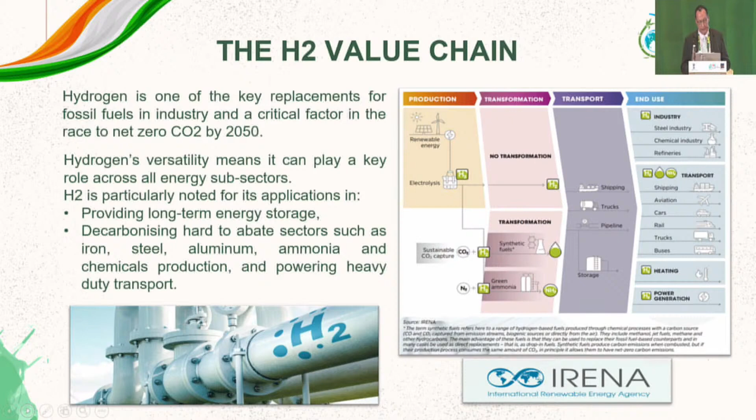Hydrogen may be a small molecule, but it's hugely important when it comes to decarbonising transport and industry. Hydrogen is a Swiss army knife because it is so versatile and can be used across a vast range of applications: in transport, in buildings, in power generation, in industrial processes, and more. But today I haven't really got time to go through all of those precise uses. I want to focus initially on how hydrogen is made.

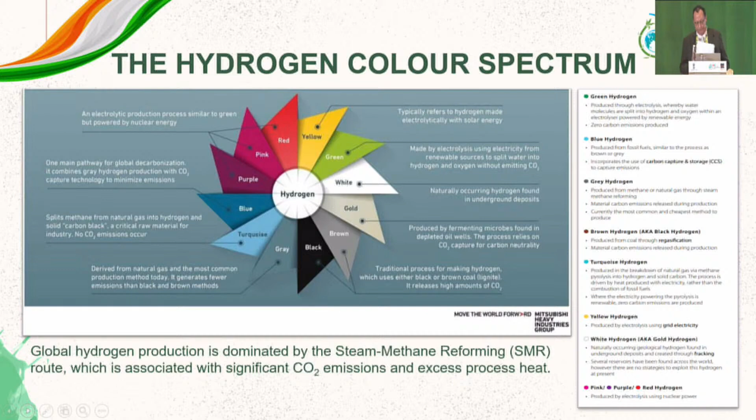Blue hydrogen involves steam reforming of natural gas, but then capturing the CO2 emissions. That CO2 can be stored or used in applications, so it's a lower clean hydrogen. Beyond black, brown, grey and blue, there are another 8 shades of hydrogen: turquoise, purple, pink, red, yellow, white, and then there's green hydrogen. In this slide, I try to capture which are seen as the clean hydrogens at the moment. Only a few qualify, as you can see there. Obviously, green hydrogen is the new gold standard for hydrogen production.

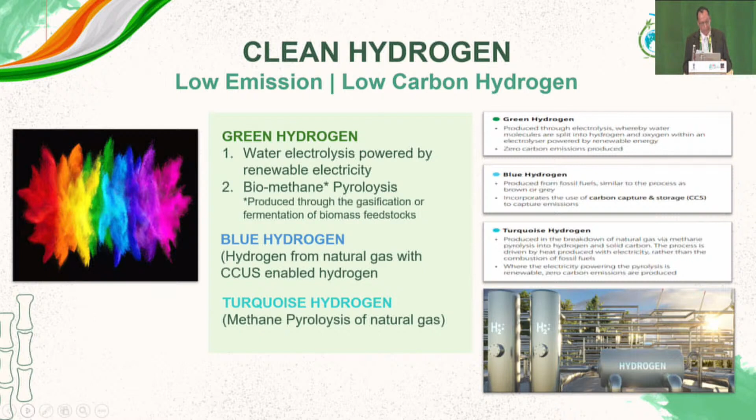And then, of course, you have blue hydrogen, where the CO2 emitted from natural gas is captured and used. And then there's turquoise hydrogen, where natural gas is used under a different technology, pyrolysis. Pyrolysis allows the carbon in natural gas to be captured in solid form, so it doesn't get emitted into the atmosphere. And then there is the biomass-derived hydrogen, which is the important one for the sugar industry. If you're producing biomethane, you can produce a hydrogen that is carbon neutral or even carbon negative.

Green hydrogen is produced with no CO2 emissions from renewable sources of electricity, such as wind, hydro, and solar, and then an electrolyzer is used to break water into hydrogen and oxygen in a process called electrolysis. That's the most basic and only way to make green hydrogen.

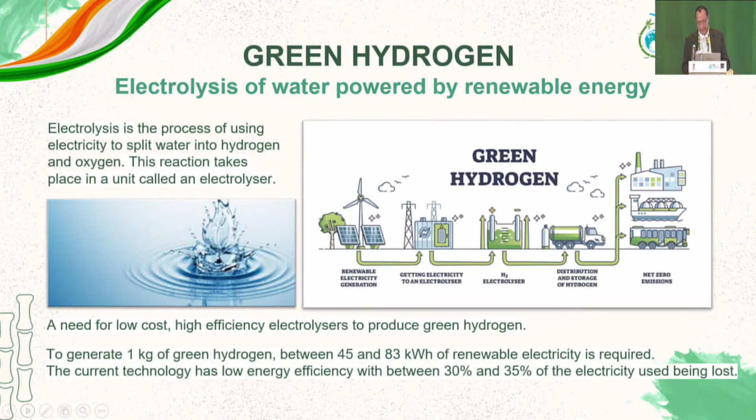Saudi Arabia is currently building the world's largest green hydrogen project. It's a joint venture. It is going to need about 4 gigawatts of solar and wind energy to produce 600 tons of hydrogen every day, of green hydrogen. That development is costing around $8.5 billion US dollars. It's a big investment.

Once produced, that green hydrogen will be made into green ammonia because it's going to be far easier to handle. And I'll come back to how you can convert hydrogen into a different substance for distribution and storage.

I just quickly want to emphasize again blue hydrogen and the importance of the carbon capture, use and storage technique, because blue hydrogen is about the only hydrogen that can be scalable and easily meet a clean hydrogen mandate. So it's important to know that as green hydrogen capacity is developed, you really are going to be developing alongside the blue hydrogen production from natural gas.

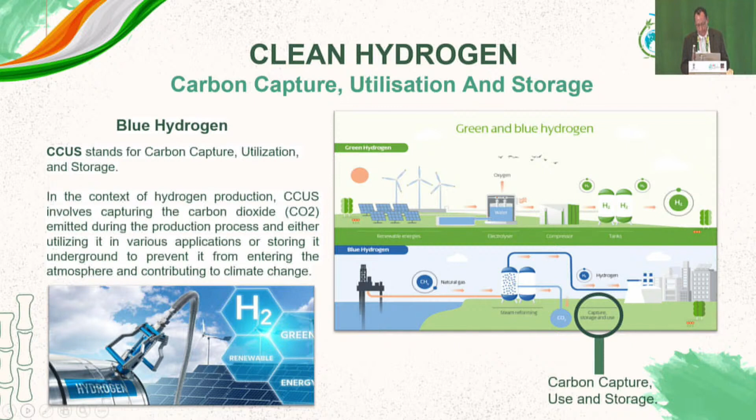Looking now a bit at the size of the hydrogen usage, according to the International Energy Agency, the world used about 95 million tons of hydrogen in 2022. That's around 3% of the world's energy use, and it's similar in size to what Germany would use in a single year.

Of that H2 use, only 0.1% was green hydrogen.

You'll also see here that there's a scenario for 2030 under the IEA's net zero emissions scenario, and it shows that by 2030, the world should be using around 150 million tons of hydrogen. And you can see that there are some new uses for hydrogen by 2030. Presently, you see use in refining and in industry, but in 2030, you see use in transport, synthetic fuels, and the power sector.

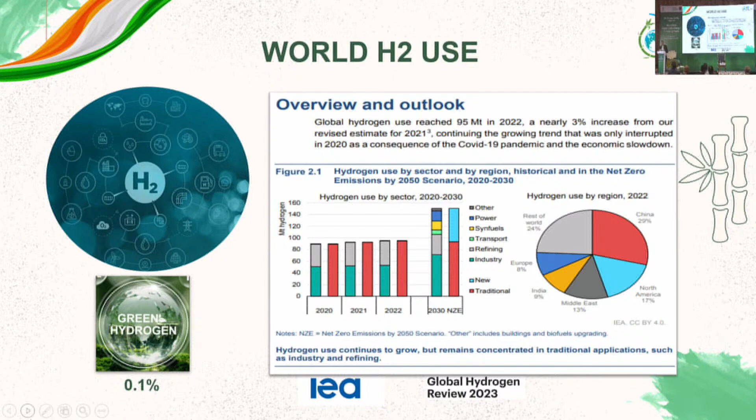Flip the coin to the production side. Well, it will obviously match at 95 million tons, but production was dominated by the unabated use of fossil fuels. Natural gas without carbon capture accounted for around 60% of production, while use of coal, mainly in China, accounted for around 21% of production. And then you have the remaining 16% produced as a byproduct of industrial processes in oil refining and in the petrochemical industry.

In terms of cleaner hydrogen, production was less than 1 million tonnes in 2022, and that was mostly blue hydrogen. Production of green hydrogen was around 100 kilotonnes, and that's how you get that 0.1% figure that I noted in the previous slide.

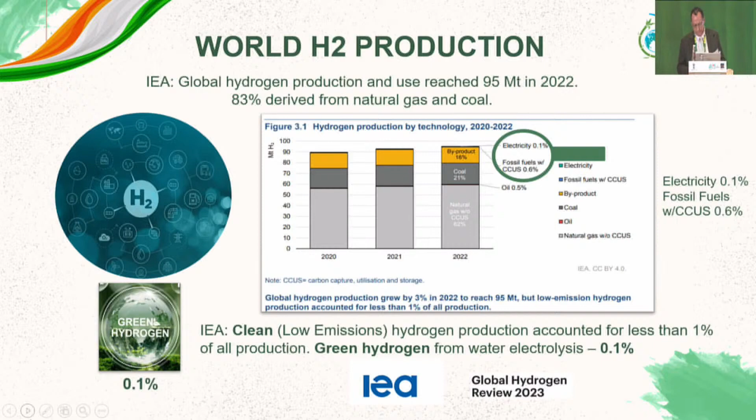Looking forwards, to align with the IEA's net zero emissions scenario, green hydrogen capacity must grow by more than 100 times by 2030. So within the next 8 years, we need to see production expand by 100 times.

Let me take just a couple of minutes to look at some of the new ways that hydrogen is going to be used, particularly in the transport sector. The fuel cell technology, hydrogen fuel cells, very important.

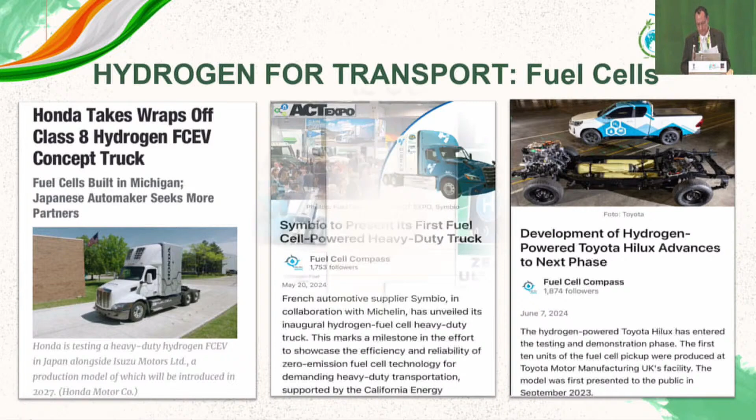There are also hydrogen internal combustion engines. They have a role to play in the coming years too, because you can get an immediate reduction in CO2 emissions while the fuel cell technology develops.

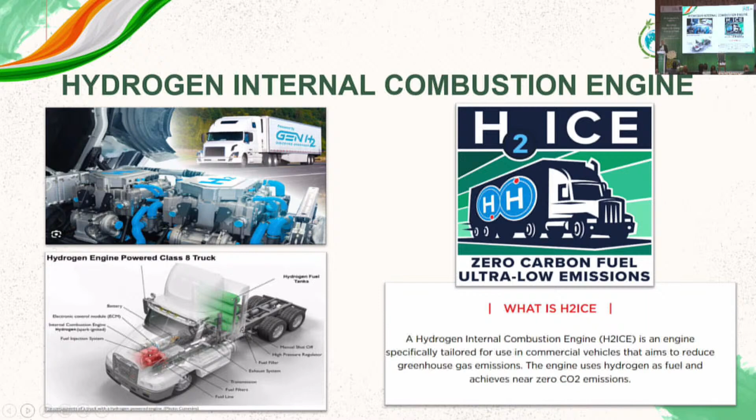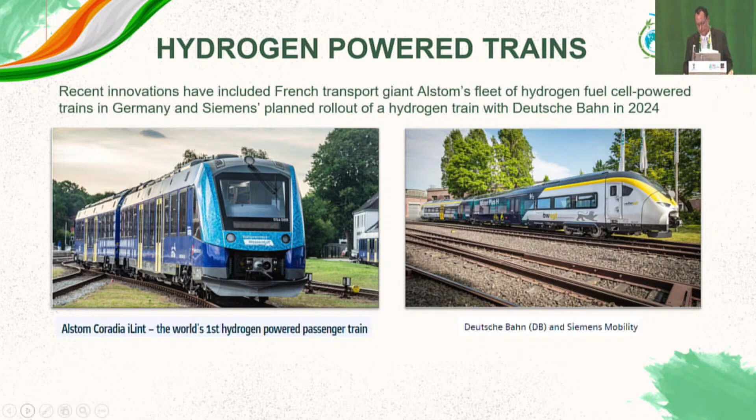Hydrogen-powered trains are already a reality in Europe. Here we have trains in Germany and France that run on hydrogen fuel cells. Hydrogen-powered aircraft are not a reality, but Airbus has the ambition to bring to market a hydrogen-powered commercial aircraft by 2035.

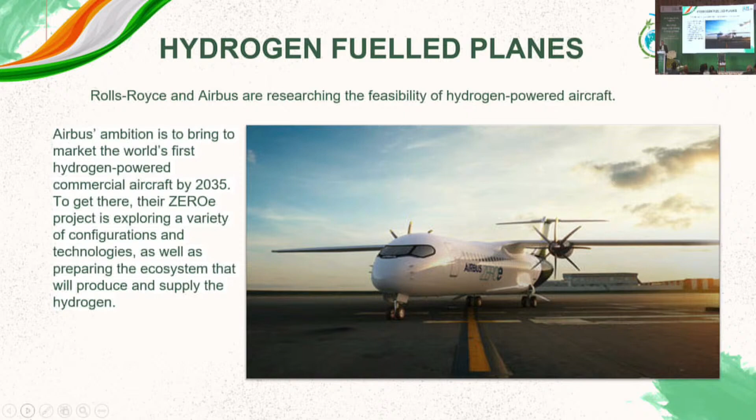We already heard about sustainable aviation fuels this morning in the previous panel. SAF is the only viable way to decarbonise aviation, and that will be the case for quite a few years to come. So as we heard this morning, SAF is a real opportunity for the world sugar industry through that alcohol-to-jet route.

Another use for hydrogen is in synfuels. They are synthetic hydrocarbons that need hydrogen to be manufactured, obviously. They can be a drop-in solution with existing fuels using existing logistics and distribution and refueling. Importantly, e-fuels drastically reduce the harmful emissions from internal combustion engines, and so can play a key role in decarbonising transport. But really, synfuels, e-fuels, compete directly with biofuels in the transport sector.

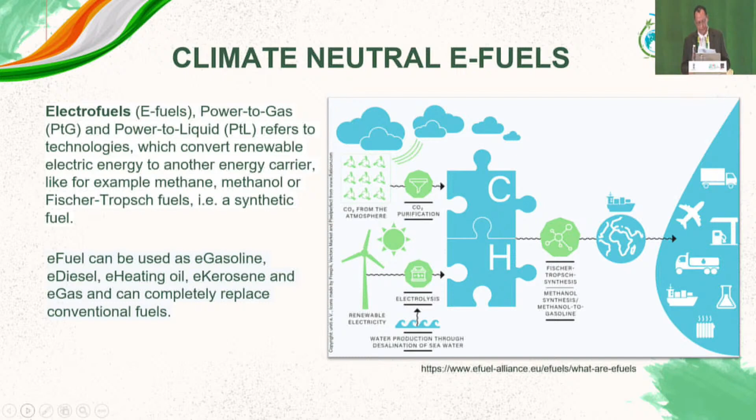And here, hydrogen for green steel manufacture. Iron and steel are a major contributor to CO2 emissions worldwide, because they use a lot of coal. But green steel making is becoming a reality. Sweden's largest electrolyzer project has been inaugurated to produce green hydrogen for green steel manufacture. The magic of hydrogen is that it makes the entire process carbon-free. By reacting hydrogen directly with iron ore, iron and water are produced instead of iron and CO2 when you use coal.

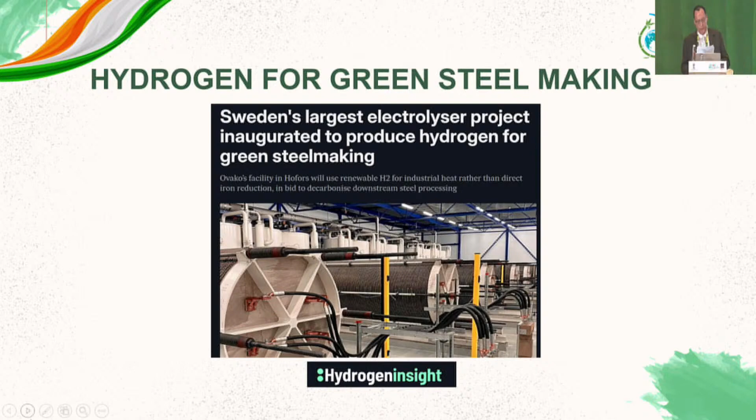But it's not all a fairy tale. There are some real challenges to pursuing hydrogen and green hydrogen in particular. I've listed a few on this slide, but in the time I have available, let's just quickly look at the cost of green hydrogen.

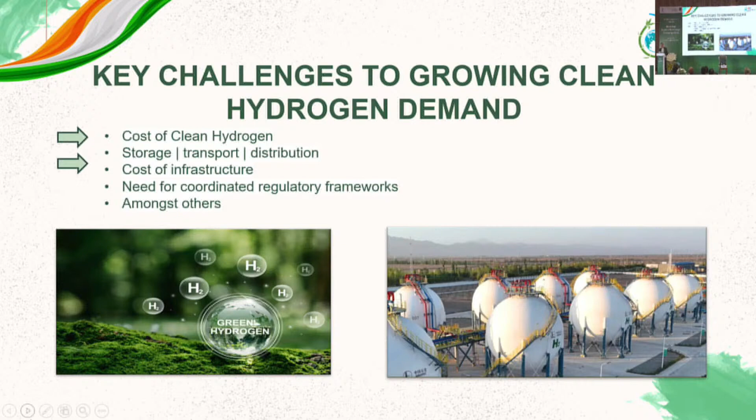Economics. Clean green hydrogen has always been far more expensive than its dirty counterparts. But that's about to change.

By 2030, the situation will change. Green hydrogen has a good outlook in terms of economics. In Brazil, China, India, Spain, and Sweden, green hydrogen from new plants is going to start undercutting grey hydrogen from existing plants by the end of this decade.

And that's because of a big drop in the cost of electrolyzers via economies of scale. It's also because there's obviously supportive government policy that will help development of the technology as well as the market for green hydrogen.

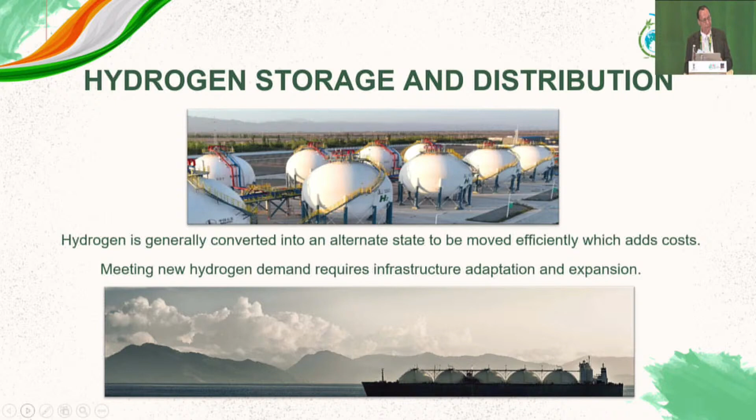So the low density of hydrogen by volume means it is difficult to transport, and it is generally converted into a different state to be moved around.

The most widely used hydrogen storage forms are compressed hydrogen gas and liquid hydrogen, and they're usually transported by high-pressure vessels and cryogenic tanks. But chemical carriers allow hydrogen to be transported at high density and much more easily.

I've already mentioned ammonia. Ammonia combines hydrogen gas with nitrogen gas, and it is a much safer and easier form of hydrogen to store and transport.

Then there are liquid organic hydrogen carriers, LOHCs, which are organic compounds that absorb and release hydrogen through chemical reactions. So LOHCs can be used as a storage medium for hydrogen and moved around easily.

Importantly, ethanol is an effective LOHC, and I will come back to that in the later part of my presentation when I look at pathways for the sugar industry to get into hydrogen.

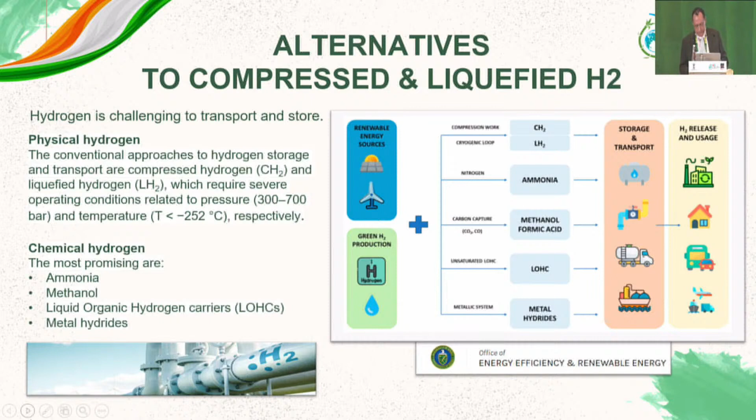There's also a technology using metal hydrides, which I don't really have time to get into today, but it's another way to move and store hydrogen.

So let's come to sugar, the pointy end of my presentation. How can the world sugar industry take advantage and find a pathway to green H2? And when they do, will it actually be economic to do so?

Now, this hydrogen opportunity, as we heard this morning, is in the context of an already abundant, significant number of ways that the sugar industry can produce green energy - ethanol, biopower, biomethane, all the ways that we discussed in the previous panel.

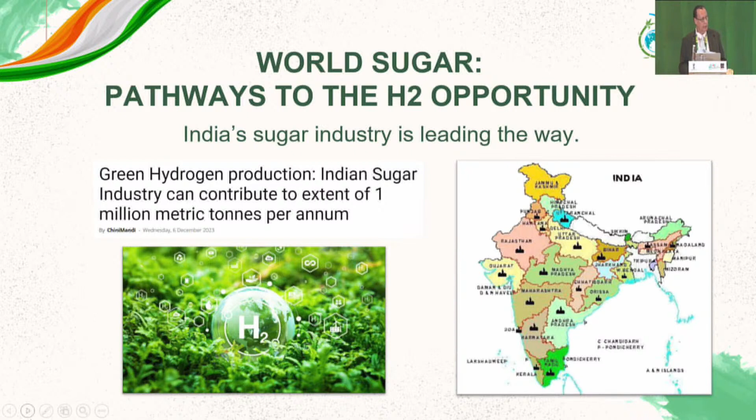India's sugar industry is at the forefront of this desire to move into green hydrogen. They have already developed a technology model that they say can produce 1 million tons of green hydrogen by 2030.

It's no wonder that India's sugar industry has its sights firmly on hydrogen when the government is so proactive in developing a hydrogen economy. The National Green Hydrogen Mission was approved by the Union Cabinet back early last year, and the mission outcomes by 2030 include development of a green hydrogen production capacity of at least 5 million tons a year. That's laudable and commendable. And to help achieve that, it's about investing in renewable energy capacity as well.

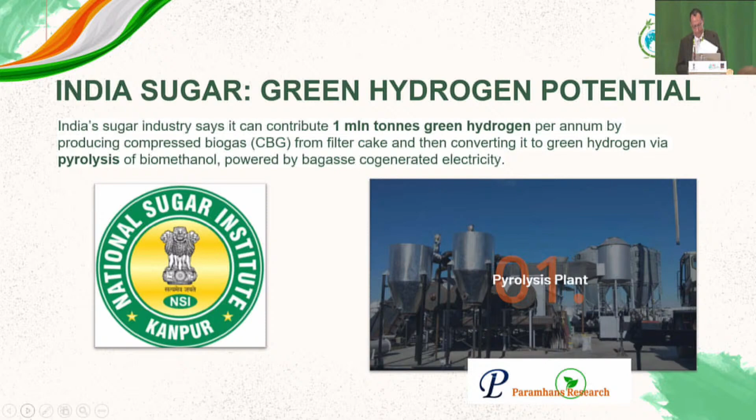The National Sugar Institute has worked in collaboration with a private company to build a demonstration plant which produces green hydrogen from compressed biogas. That's produced from filter cake, as we also heard earlier. You then convert biomethane into green hydrogen and solid carbon black using pyrolysis technology. Methane pyrolysis uses heat to split methane into hydrogen and solid carbon, and as such it does not emit any CO2. That solid carbon can be used in other applications.

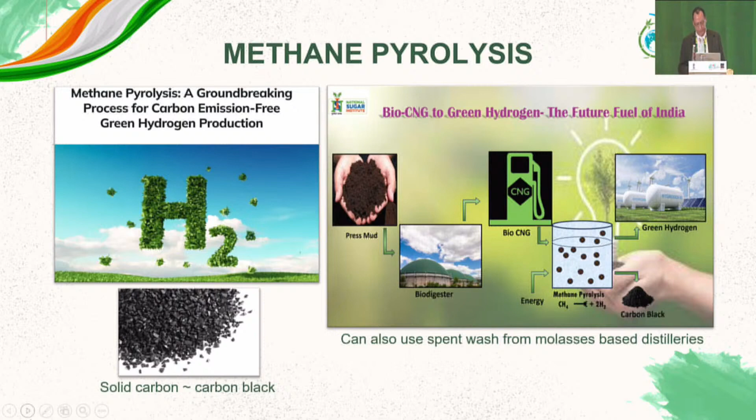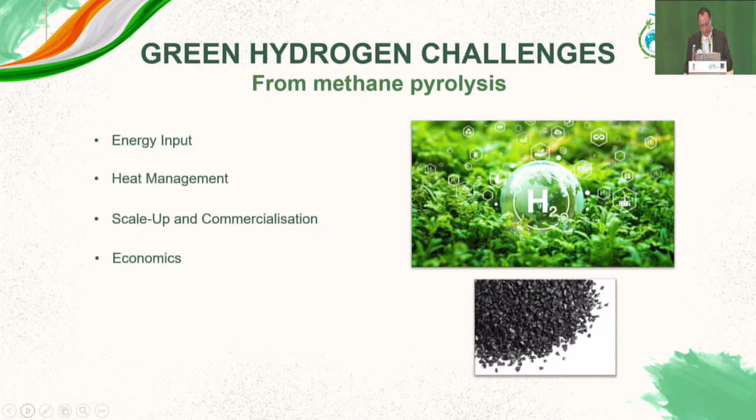But there are challenges to pyrolysis becoming fully commercialized, and I'll mention them briefly. There's an issue with a high level of energy input required, issues with heat management. There's a real challenge in scaling this up into commercial scale. And then, of course, there's the whole question of economics. The cost of producing green hydrogen through methane pyrolysis has to be competitive with other hydrogen production methods. You'll get those economics if you can reduce the operational and capital costs of the pyrolysis technology.

The world's other massive sugar industry, Brazil, like India, produces biogas using biodigesters. They use filter cake and vinasse from the ethanol process. Much of that biogas is presently used to boost biopower production from sugarcane bagasse. According to some, it's possible to increase biopower generation by up to half if you use biogas from your filter mud and your vinasse.

So even while Brazil is a biogas producer in the sugar industry, as far as the hydrogen opportunity goes, Brazil is taking a different approach. They're focusing on ethanol as an effective hydrogen carrier. That makes a lot of sense because you then have the existing ethanol distribution, transport, and filling station network already in place. You don't need to develop a new distribution network.

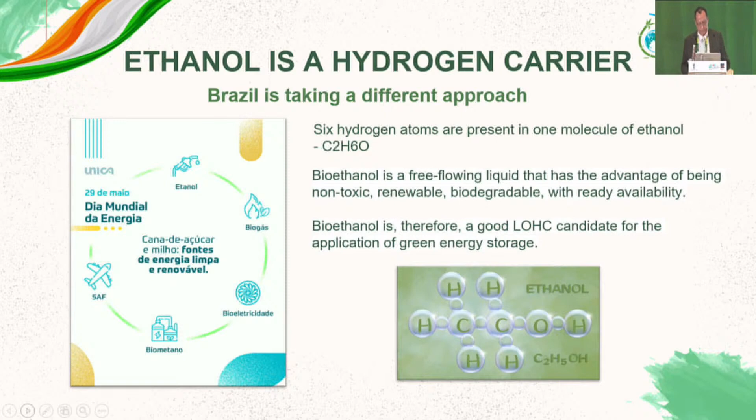So Brazil is testing the possibility to produce hydrogen directly from ethanol using an ionic membrane exchange technology. And this apparently is already working in a demonstration plant. It's a partnership between Shell, the University of Sao Paulo, Hytron - the firm that has developed the technology - and there are also government agencies involved.

Talking with my good friends at Datagro, they say that taking full advantage of the 42,000 ethanol fuel stations in Brazil, they estimate that the fuel efficiency of this process equates to around 35 kilometers per litre of ethanol feedstock.

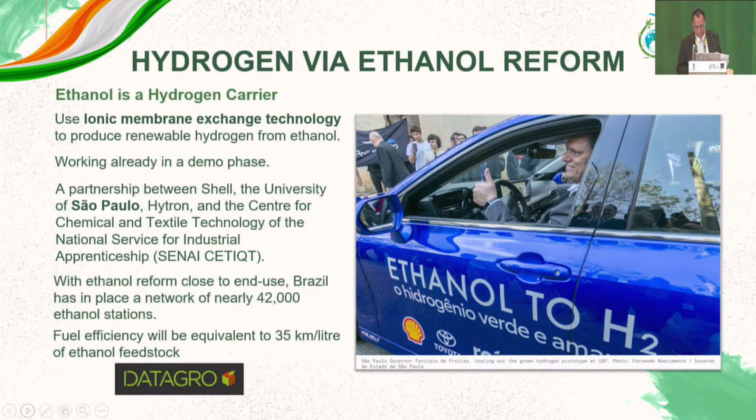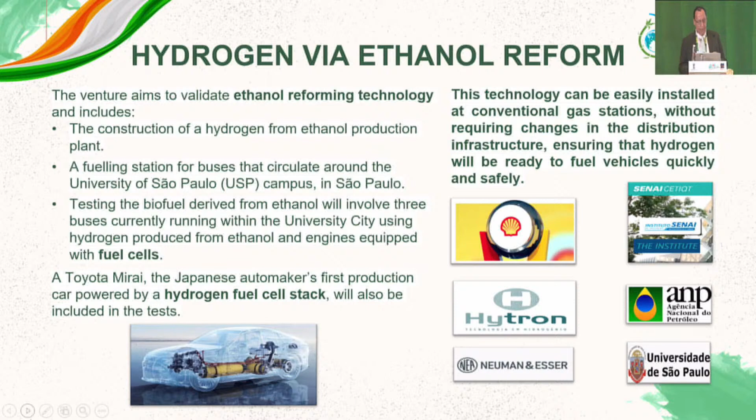The hydrogen produced under this project is going to be used in 3 fuel cell buses running around the campus of the University of Sao Paulo. And it's also going to be used by Toyota's first production car powered by a hydrogen fuel cell stack. So it's a really interesting approach to how to enter the hydrogen sector.

The other obvious route for the sugar industry, particularly in the cane sugar industry, to produce hydrogen is to use your renewable bagasse-generated electricity to power electrolyzers for the electrolysis of water. But for many industries, solar and wind could be the most cost-effective source of renewable energy, so you may not be competitive using this approach with your bagasse-generated electricity.

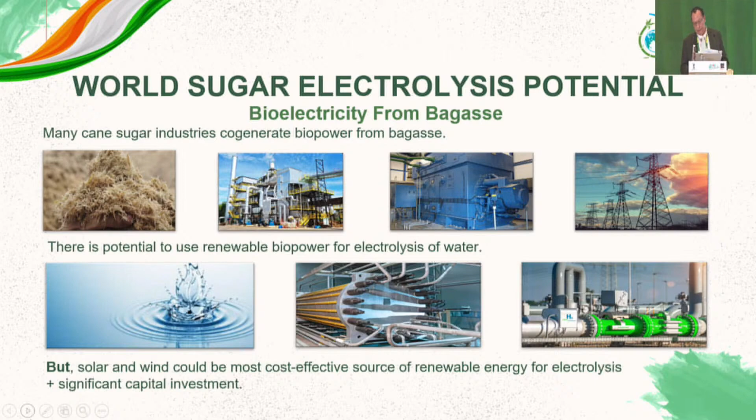Then there is hydrogen from cane bagasse through gasification or anaerobic digestion. But I heard this morning the big interest here in India is to use bagasse for second-gen ethanol, so this is not an obvious route. And as far as I'm aware, I don't think there's one industry in the world that currently produces biogas from bagasse.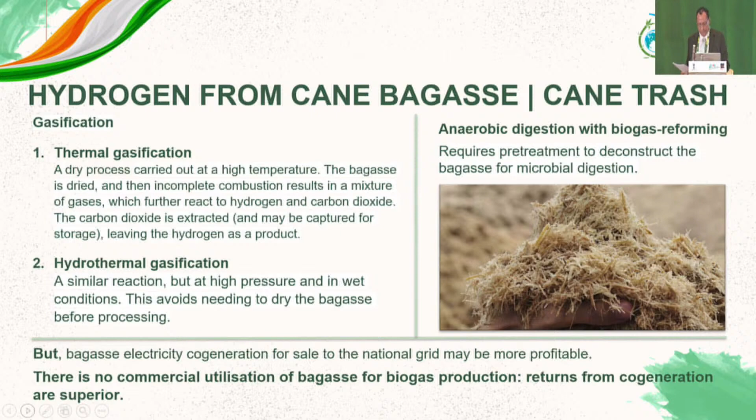In Europe, which is the real leader in hydrogen, the beet sector is looking at biogas from beet pulp, but not to make hydrogen. Their incentive is to make biogas to put into their combined heat and power plants to decarbonize their factories.

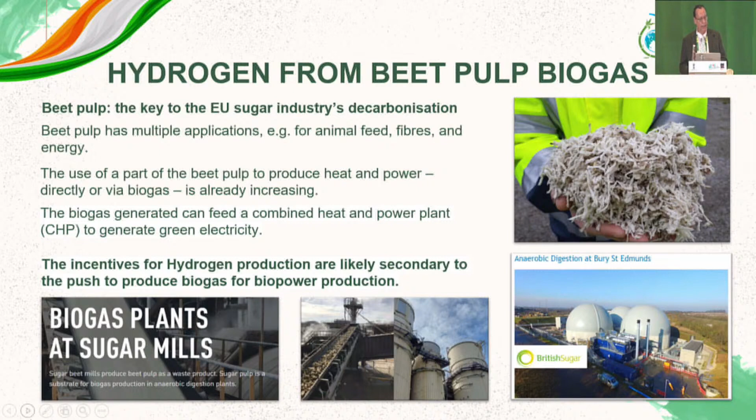So I've been asked to finish up, and here I am finishing up. The global shift towards decarbonisation is accelerating, with clean hydrogen playing a pivotal role, green hydrogen in particular. Many challenges, but the benefits of a carbon-free economy are obviously clear, and it's a necessity to move towards decarbonisation.

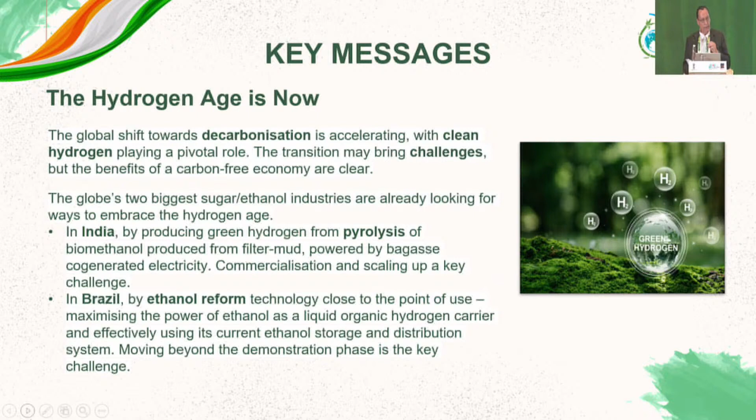As I just said, India and Brazil are taking different approaches. India's approach with pyrolysis - the real challenge there is commercialisation and scaling up. In Brazil, with ethanol reform, the challenge is to move beyond the demonstration phase and prove that you can do this at large scale using the existing ethanol distribution network.

Using your renewable energy to produce hydrogen via electrolysis, the economics may not work. And for the beet sector, the incentive is to produce power for your beet factory rather than to produce hydrogen. So in the end, the hydrogen age is very much now.

I want to finish by commending our hosts, the Government of India, and the sugar industry for taking this proactive stance on hydrogen. It's good that the sugar industry has so deftly identified a pathway to get towards that hydrogen economy. So with that, let me say again: the hydrogen economy is not just a possibility, but it's an absolute necessity for the future of the world. Thank you.